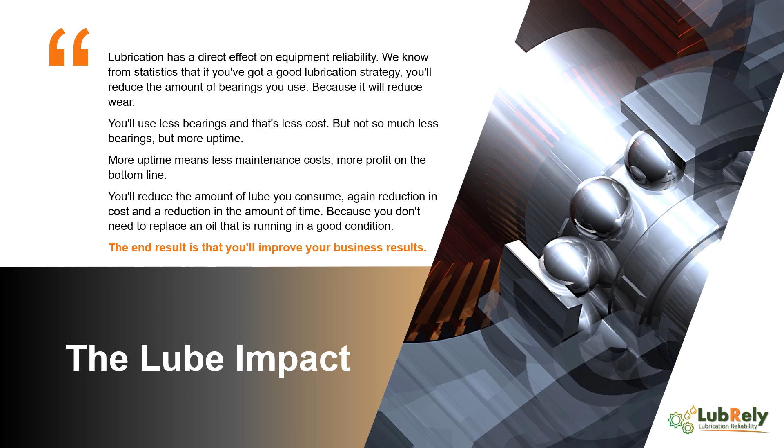More uptime means less maintenance costs, more profit on the bottom line. You'll reduce the amount of lube you consume. Again, reduction in cost and a reduction in the amount of time, because you don't need to replace an oil that is running in a good condition. The end result is that you'll improve your business results.

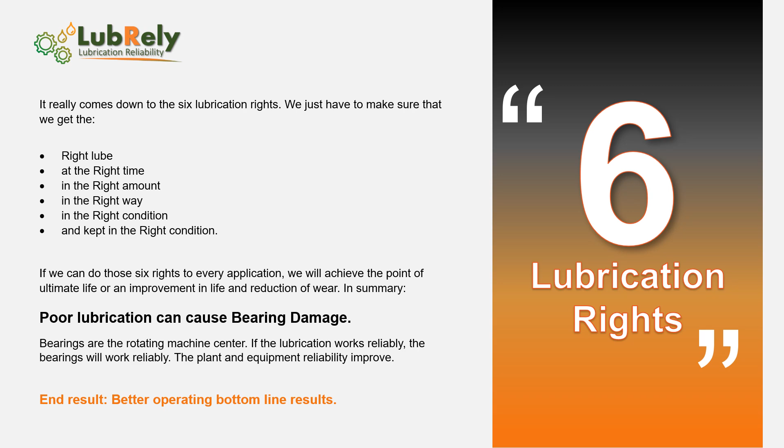It really comes down to the 6 lubrication rights. We just have to make sure that we get the right lube, at the right time, in the right amount, in the right way, in the right condition, and kept in the right condition. If we can do those 6 rights to every application, we will achieve the point of ultimate life or an improvement in life, and reduction of wear.

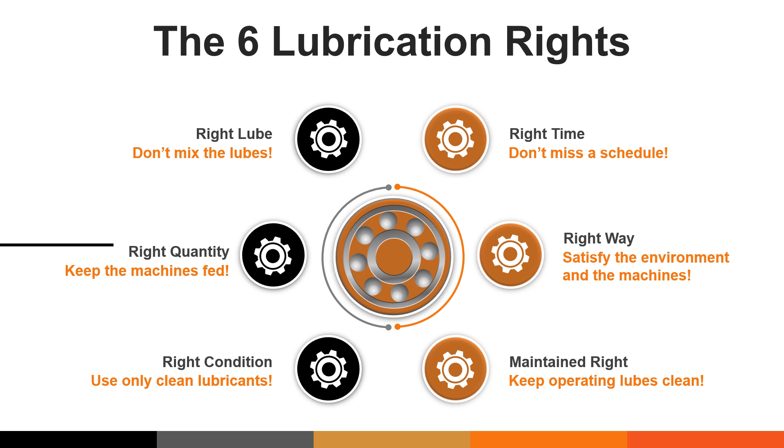In summary, poor lubrication can cause bearing damage. Bearings are the rotating machine center. So if the lubrication works reliably, the bearings will work reliably. The plant and equipment reliability improve. End result: better operating bottom line results.

Let's look at lubrication. We will start with the 6 rights. The right lube. The 2 major classes of lubricants are oil and grease. The selection of the type is based on the application. Greases are used extensively in the lubrication of small bearings. As a rule of thumb, use oil where possible, because it can be cooled and filtered. This is not possible for many applications where grease is the better choice.

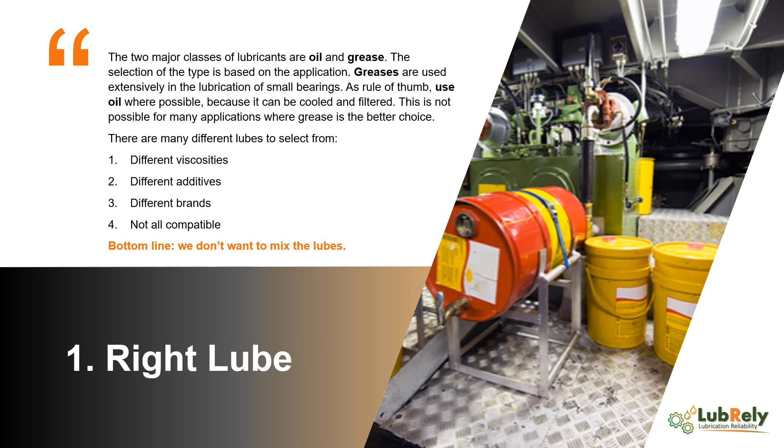There are many different lubes to select from. They are different viscosities. They have different additives. There are different brands. They're not all compatible, and if you mix them, often you'll cause chemical damage and reduce their lubrication properties. Bottom line, we don't want to mix the lube, so we have to have the right lube.

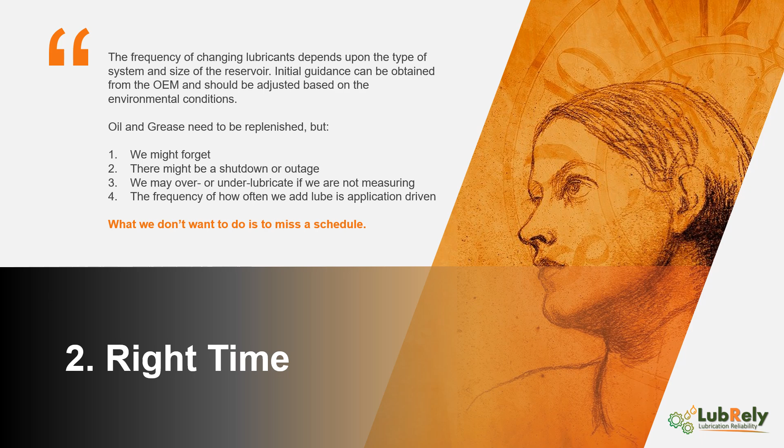The right time. The frequency of changing lubricants depends upon the type of system and size of the reservoir. Initial guidance can be obtained from the OEM and should be adjusted based on the environmental conditions. Oil and grease need to be replenished, but we might forget. There might be a shutdown or an outage, and this can interfere with our schedule, so we may miss a schedule. We may over or under lubricate if we're not measuring the frequency of how often we add the lube is application driven. What we don't want to do is to miss a schedule, or the right schedule.

The right quantity. More is not better. Too much lubricant in a system can be as destructive as not enough, as evidenced by the over-greasing of electric motors, which is a major failure mode. Speed, load and temperature define the quantities we need. We don't want to over-lube, because we know that will generate heat. We don't want to under-lube, because we know that can cause starvation. Starvation has an effect on the amount of lubrication film thickness.

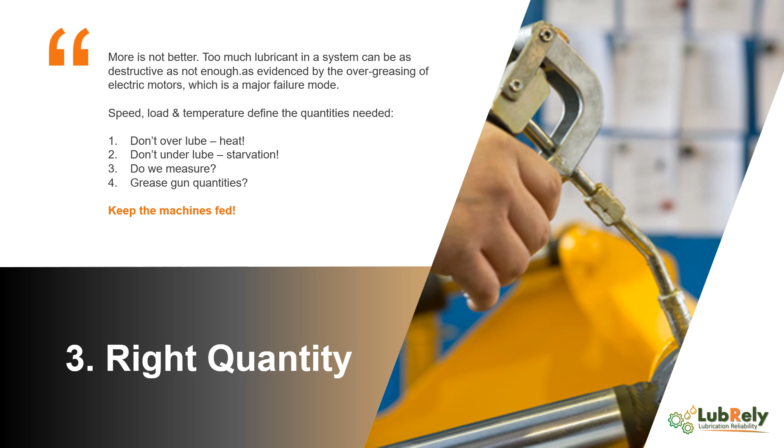Do we measure how much we put in? If not, should we be thinking of it? Do we really know how much grease one shot of a grease gun is adding to the bearing? Do we know how many shots or how many ounces or grams we need to add to that particular bearing at what time? In other words, we need to keep the machines fed, and fed correctly.

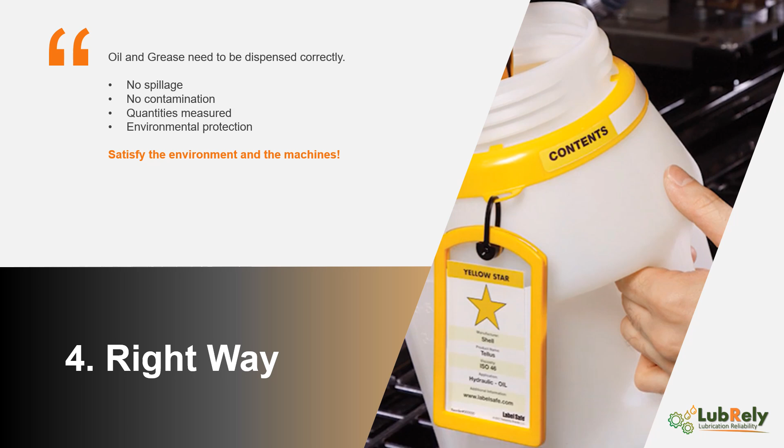The right way. Oil and grease need to be dispensed. We don't want to spill anything, because that causes problems. We don't want the oil to be contaminated. That's the purpose of OilSafe, to eliminate that. Still today, many people use open jugs, buckets, same funnels for different oils. These are contamination problems. The quantities need to be measured, and we need to make sure that the environment is protected. In other words, we have to satisfy the environment and we have to satisfy the machines.

The right condition. Dirty or contaminated lube causes wear and damage. That we've seen with the ISO 4406 example and Dr. McPherson's example. We want to use only clean oil. We want to clean it in the storeroom, because new oil is not clean, and the new oil can get contaminated within the lube room. Unclean containers pass on dirt. It is really a clinical process. We only want to use clean lubricants.

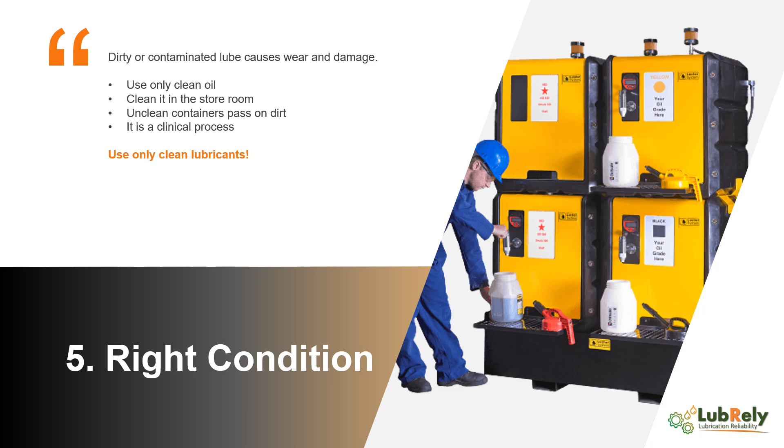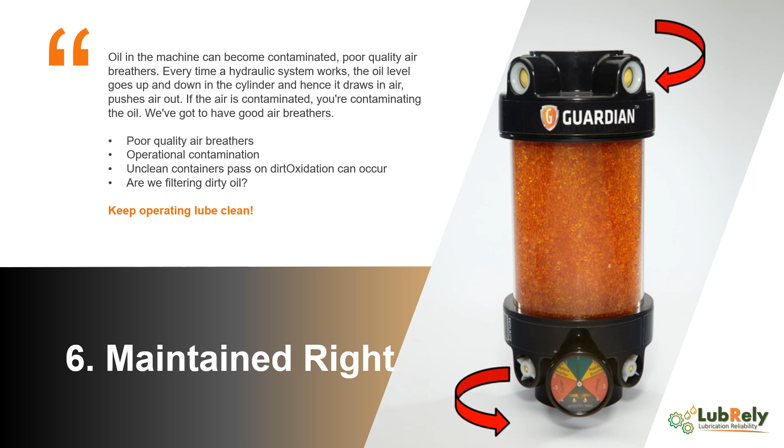Maintained right. Oil in the machine can become contaminated. That means poor quality air breathers. Every time a hydraulic system works, the oil level goes up and down in the cylinder, and hence it draws in air, and pushes air out. If the air is contaminated, you are contaminating the oil. So we have got to have good air breathers. We don't want operational contamination, which also can occur through oxidation. We need to be monitoring and filtering the machine to get cleaned up dirty oil. In other words, we need to keep the lubes clean.

Establishing a world-class lubrication program through application of the 6 lubrication rights will pay dividends. In the long run, enhanced equipment reliability will result in major bottom-line savings. The first step is to recognize and promote the importance of a well-designed lubrication. The next step, the most difficult one, is to effectively implement that program.